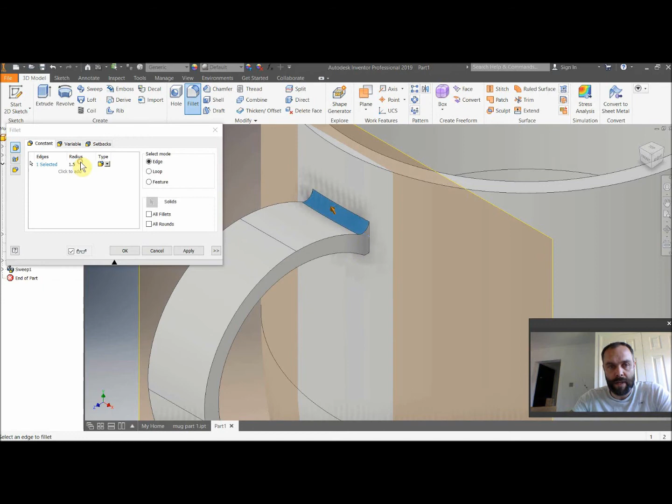So I've selected my line there, and I can go over here and amend the fillet to be the size I want. At this point, if you want to play and see what happens with different fillets, it's probably a good idea, because sometimes you find that certain fillets become impossible to do. Obviously the radii become too big or they overlap each other, and sometimes you have these errors when you're creating your own products. So it's mindful to sort of experiment with this a bit as you go. So we're choosing 5 for the first one there.

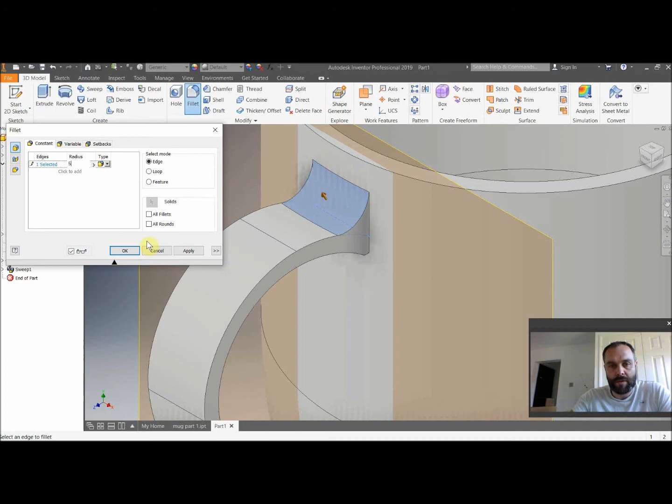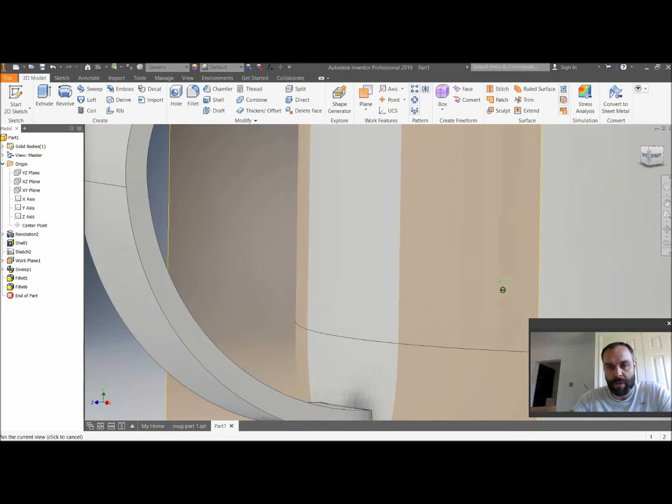I'm then going to move the view cube around slowly like this, click the middle mouse to find myself in a position where I can see where the handle is attaching to the mug body itself, and I'm going to choose my next line there. Okay, as I said, this is going to be a radii of 6 like this, and I'm moving down now, middle mouse again, to get to my next one, which is on the inside surface at the bottom of the handle. I'm then selecting this one here, a fillet again, this time of 5mm, and clicking OK.

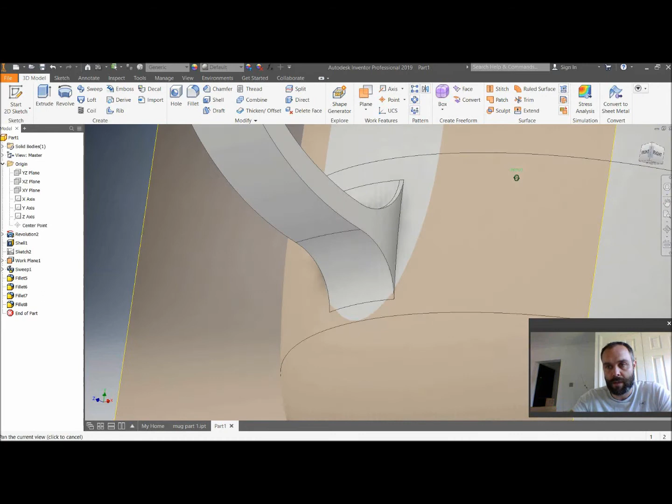And scrolling round to the final one on this plane here, the bottom surface there, and this is slightly bigger, a radius of 8. As I say, you can experiment with these if you wish and see what it looks like with slightly different radii as you go forward. I'm now going to zoom out just to see what I've done. Okay, so we've got those fillets done on those sides, and it now looks like it joins the body in a much better way than it did before.

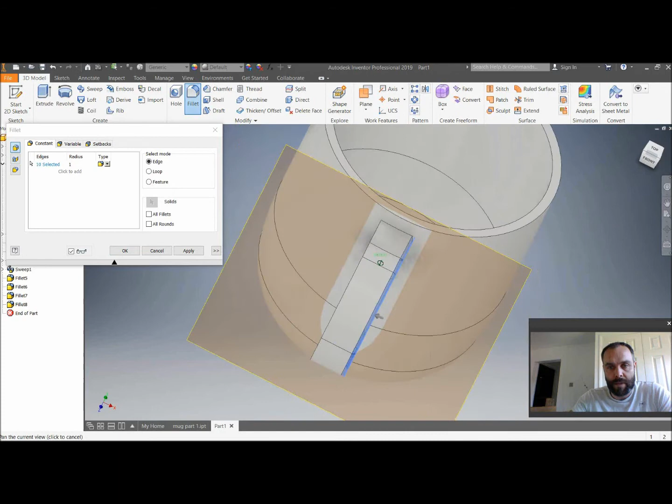Now the last couple of fillets we're going to apply is to this top surface of the mug, and obviously to this side of the handle. Okay, so on the side of the handle I'm just going to choose these sides, this one here, and make it a radius of 1, and I'm going to select this one and that one. I'm going to move around then to the other side of the handle, and do the same on the other side.

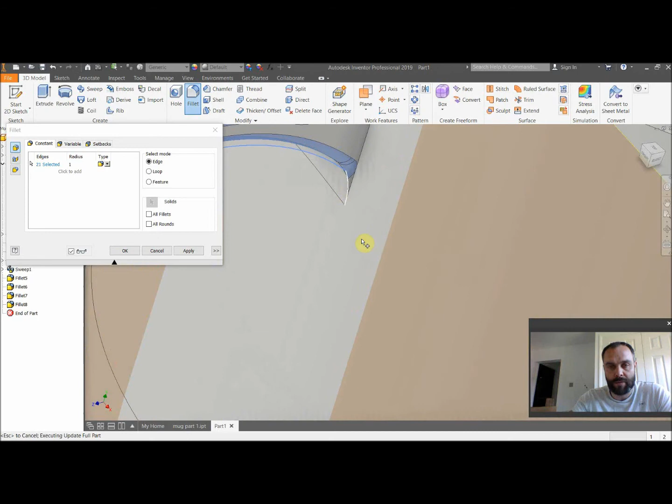It's quite a good idea to double check your work here as well, because obviously you want to make sure we don't miss things off. As you can see, I've missed just the little bottom part of the fillet there, so I'm selecting that, and I'm just going to check over the other side as well, because it's very likely if it's a symmetrical object it's going to miss the same sort of fillet, and there we go, we've sure enough got another tiny little section there that can be filleted off. So I'm going to click OK there, and there we go, we've rounded off the edges of the handle.

Now finally, the top of the mug, the bit where we actually apply it to our mouth effectively, this wants to be rounded off as well.

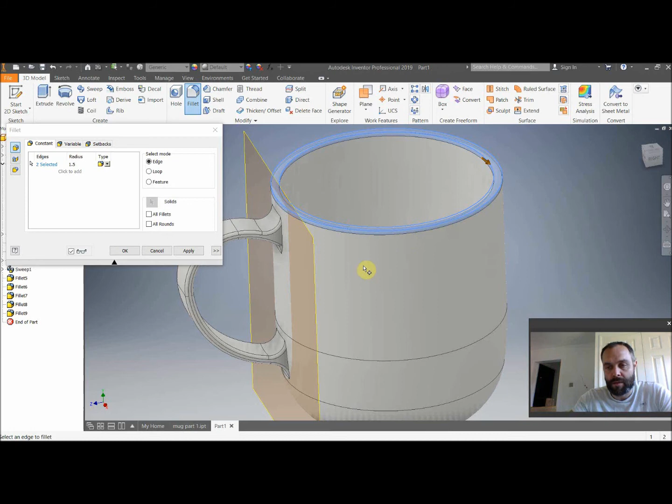So I'm going to choose the fillet tool again, and I'm going to do a radii of 1.5 here, okay, and I'm going to select both the outside and inside edge, and obviously that radii is the maximum we can go because the thickness of the shell there is 3mm, giving us a perfect rounded top. Okay, so there we have the finished mug.

Okay, the final stage really, if you wish, would be to apply some sort of decorations, or to apply some colours and finishes to this mug, and we're going to do that just using the tool up the top here. So we've done this before in a previous video. Now the mug, as we said, was bone china, and in the Inventor library you'll probably find there's a series of materials that you can actually use.

So we're going to just go down here and have a little look at the materials library there, but if we look in the little down arrow, we can choose ceramic, and we're going to choose a ceramic which looks like the actual bone china we've got here. Okay, so this is quite a shiny, glossy, glazed finish. I'm going to choose this one and just drag it up to the top.

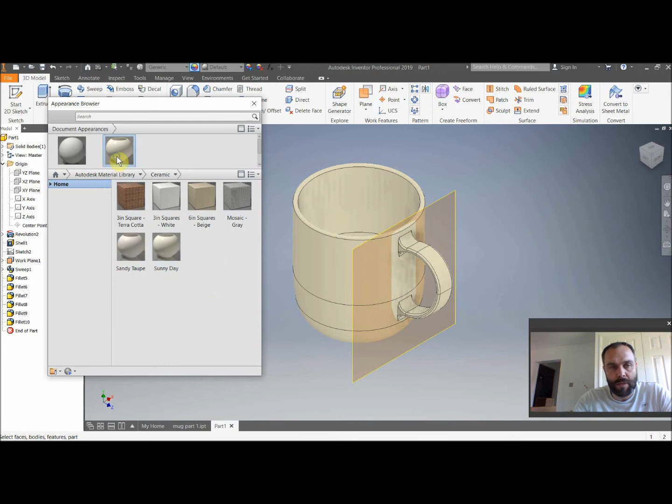Okay, and I want to apply that to all of the surface. So what I'm going to do is select the whole of the image like this, and then just click that, and it's going to apply that to the cup itself. Now obviously this is the wrong colour, and I don't think it's quite as reflective as I'd like it to be. So whenever you've got these kind of generic materials that you can find on Autodesk, what you can also do is if you right click these, we can go to edit like this, and we can go in and change properties of the actual render itself.

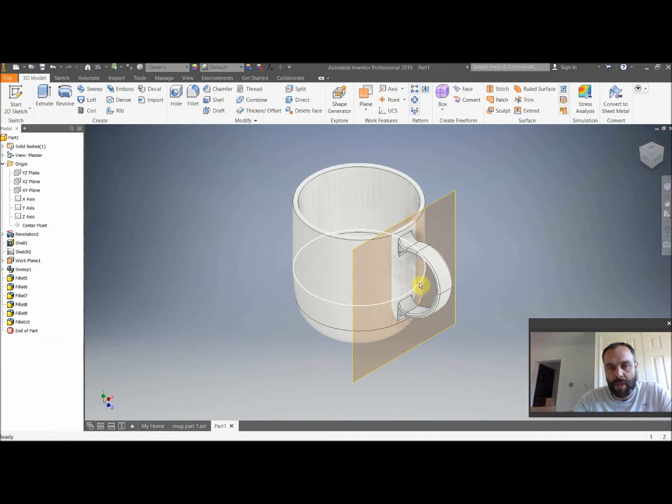So you can see this is high gloss, that's great, it is porcelain, which is fantastic, but the colour there is this sort of a beige. So what I'm going to do is just swap that to white and click OK, and then click apply and OK again, just come out of this, and there we go. I'm happy with my finished material.

Now the last thing we're going to do is just have a little look at this under a better finish to see the final object in all its glory, hopefully. But the one thing I do want to do is hide this work plane here so I can see it a bit more clearly. So I'm going to scroll down and find the work plane till it's highlighted. There it is, work plane 1. Right click this, and just where it says visibility and there's a tick box by it, I'm just going to turn that off so I can just see the mug itself.

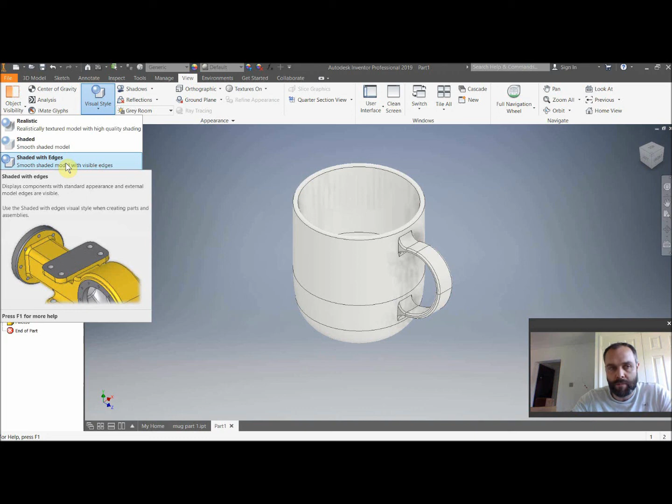Now as I said, if we go into view up the top, you can see the visual style of this at the moment is shaded with edges, which allows the computer to run smoothly and quickly while we're working. Okay, now if we want to see what it's actually going to look like a bit more realistically, we can choose the realistic as the render model. Okay, and we can turn on lots of these other options to make it more realistic.

So I'm finally going to put my shadows on. I'm going to see the reflection, including the ground plane there, so we can see it reflected across the ground plane, and we're going to change it from orthographic to perspective like this. So there we have it. There's a finished mug. We'll just see it from a few different angles like this, spin it round so you can see it finished like that.

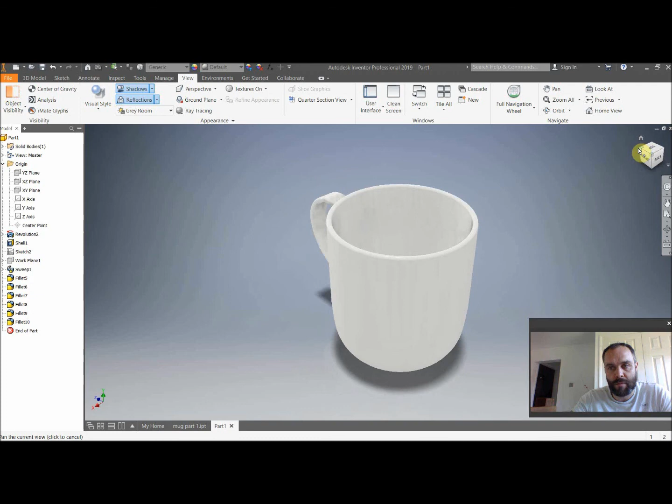Hopefully you've produced something along those lines. Let's have a little look under the bottom as well so we can see that indentation, and we can see it rotated round from the different views. Okay, so I hope you have some luck with that, and I hope your rendering and your modeling goes well.